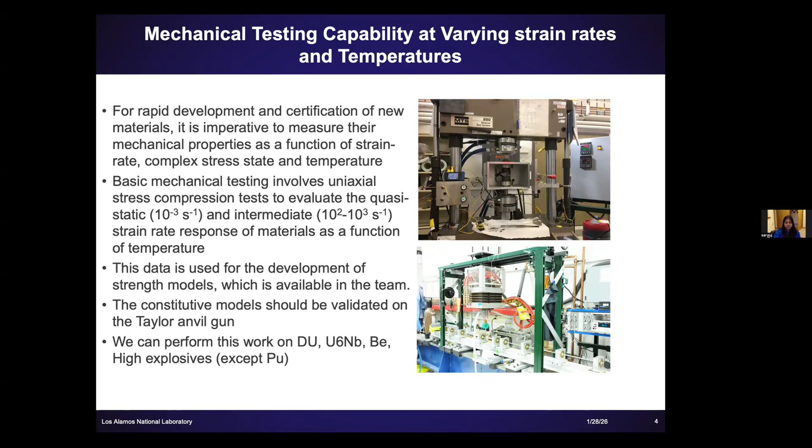We just don't work on plutonium. Thank God for that.

We also do a lot of work in the nuclear energy area. We have some unique capabilities where we can do testing on fuel at really high temperatures, up to 2000 degrees C, and we can also go to really low strain rates of 10 to the -5 to 10 to the -1 per second. That's important because in NE, when you're looking at fuels for reactors or space reactor applications, these materials are going to be subjected to really high temperatures. So we kind of built that capability.

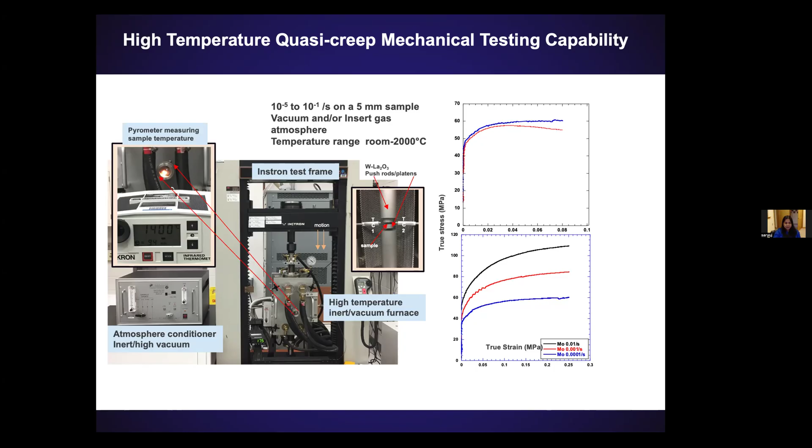This is another part of our team where, in addition to our conventional mechanical testing on materials, we also do a lot of shock experiments on materials to parameterize and measure the equation of state of materials, and to look at how materials fail, especially as a function of the microstructure.

We have 3 gas guns, an 80 and a 100 millimeter gas gun. What you really need to know is that allows us to go from 50 meters per second to about 1200 meters per second in terms of velocity and pressure ranges. So when we're collecting dynamic property data, we can investigate a large range of pressure, which is important when you're trying to parameterize these properties.

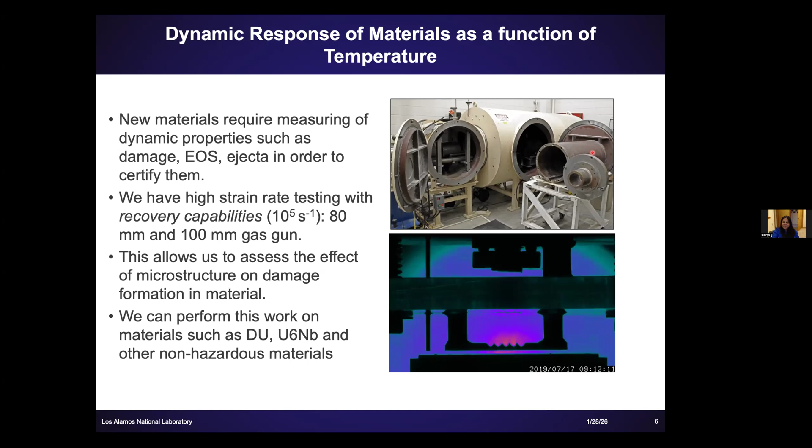I like to joke that most people on my team are actually material scientists, and we just look at shock as a way of subjecting materials to interesting loading conditions to see how they fail. That's why we also have that low velocity gun, which a lot of people don't tend to have.

I don't know what everybody's background is here, but when I first started working on shock or dynamic loading, I had no clue what we were talking about. So I'd like to explain what shock or dynamic loading is, and how you get failure under it.

Excuse me, I'm a little under the weather, so my throat hurts when I talk a lot, so I'm going to drink some water.

So a shock event is anything that creates a perturbation in your material that travels faster than the speed of sound.

In reality, how we induce that shock wave in your material depends on your application, but it can be done in multiple ways. A lot of the applications I'm going to talk about are related to gas guns, but you can also use high explosives to drive a shock into a material.

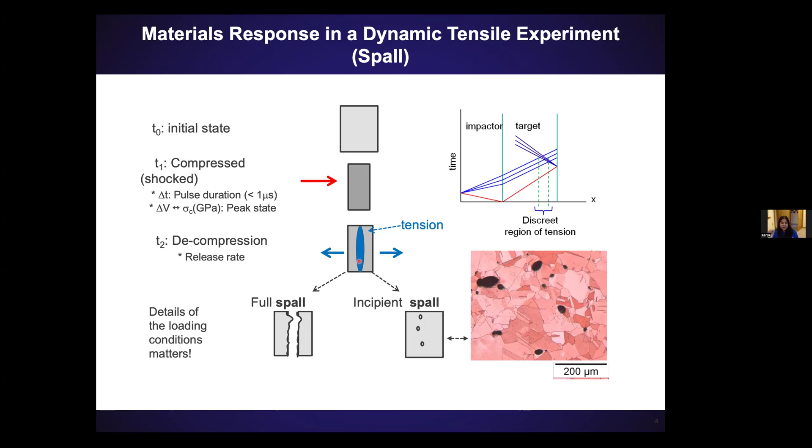For most people or most labs that do this type of work, the primary diagnostic is photonic Doppler velocimetry. Simply speaking, you shine a laser of known frequency on the back surface of a sample. As the sample starts moving, there's a frequency shift. Once you measure that frequency shift, you could do a Fourier transform and essentially get the velocity at which your sample is moving.

I'm going to run through an animation on the right side here, where you're going to see that space-time plot I showed you, and what that might look like in the velocity-time space. You get impact, and here's your laser point, the PDV point that you're measuring at the back surface of the sample.

As the sample gets impacted, the shock hasn't reached the back surface yet, so essentially your velocity is zero. The back surface hasn't caught anything yet. When your material...

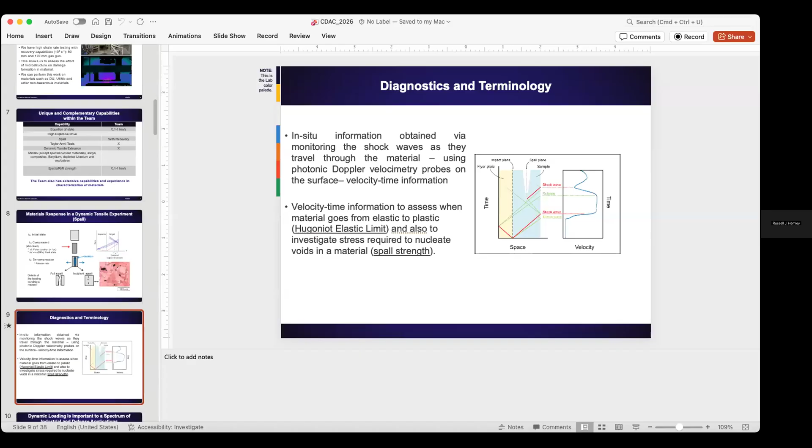I don't know what happened, my computer just quit. Can you hear me? Yes, I can hear you. Okay, I'm going to share my slides again, sorry about that. I'm not sure what happened - my computer just froze and kicked me out of Zoom. Okay, so I think I was here. Hopefully you guys all heard where I was. I think that's where we lost you.

So basically, the point I was trying to make here is nothing really happens - you don't measure anything in the PDV until something happens at the free surface. These two waves get to the surface, the material gets shocked up, then the signal stays constant. Nothing is happening until this release happens and the shock gets caught up between this small scab and the free surface, and you get this ringing type behavior.

So usually this is the primary diagnostic used in shock experiments to understand the dynamic behavior of materials. Like I told you, in our team, we kind of go beyond that and do recovery of samples.

The other interesting thing is in a lot of metals, when you do normal mechanical behavior measurements, there's a yield strength, the elastic to plastic transition stress. Similar to that, there is elastic to plastic transition under shock, called the Hugoniot elastic limit.

That can tell you a lot about your material and the deformation mechanisms being activated. You can use this free surface velocity plot to also calculate the stress required to nucleate voids. Again, that's an approximation - you look at the difference in velocity between here and the top point, and convert that using the bulk sound speed and density of the material into a stress required to nucleate voids.

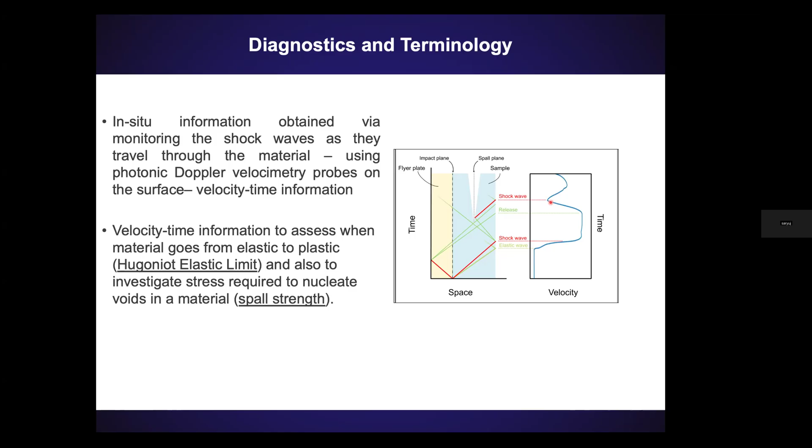That gives you an idea if I make a material using additive manufacturing versus conventional manufacturing, does that really affect the spall behavior of the material?

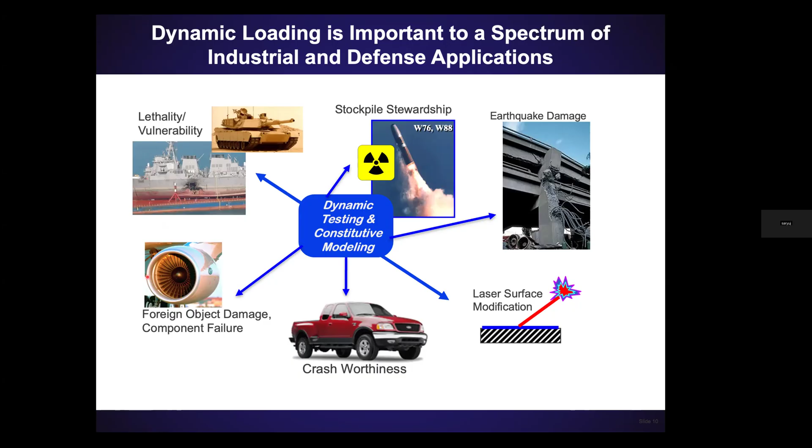Why do we care about dynamic behavior of materials? Well, there's so many applications. A lot of them are within the DoD, but also in our regular life - a few years ago, maybe a decade now, there was that plane that had to land on the Hudson River, because birds flew into its engine and caused substantial damage. So you can imagine if you want to make materials more resistant to damage, there can be multiple applications in various industries, including the car industry.

Now, in my team, of course, we can't go and do full scale tests. We can't crash 100 cars like the car makers do, or have hostile encounters with actual vehicles in the DoD. So what we do is a lot of small scale lab testing to link microstructure to failures so that we can make better materials.

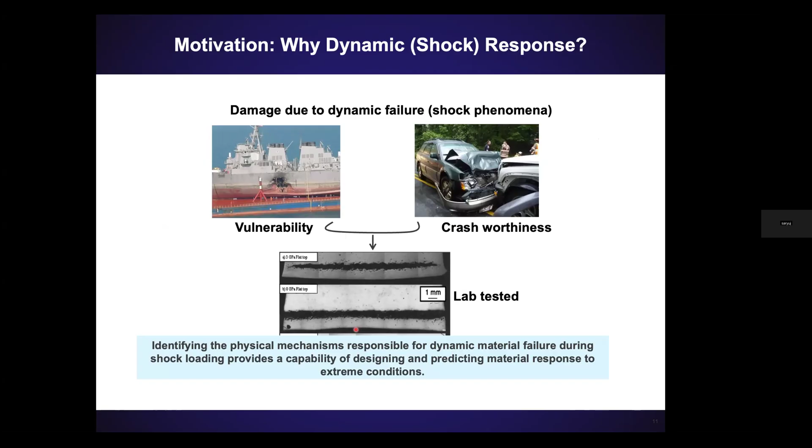So today I'm going to talk about an example we worked on in our team related to joining of different materials, and how that process itself can affect the dynamic properties of materials.

Most of you who are engineers know that it's very rare to have components made out of a single material. You can have coatings, or materials in nuclear energy where you're welding things together. Regardless of the technique, there are a lot of metallurgical challenges in general when trying to connect different materials, and those interfaces between materials are what end up dictating the lifetime of that component a lot of the time.

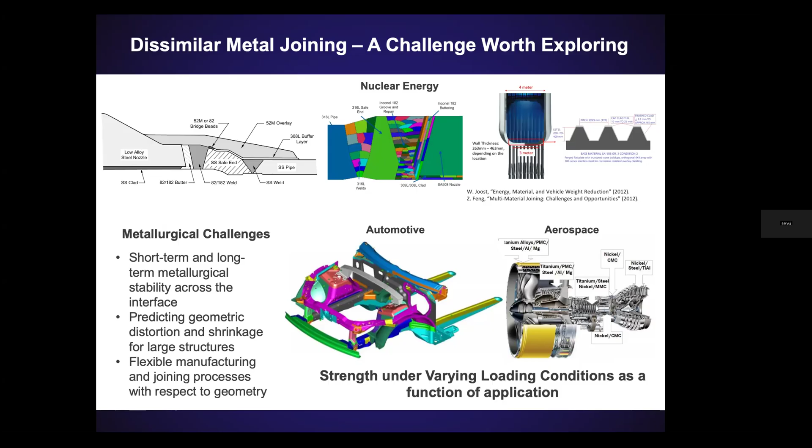There can be different thermal expansion between materials. Certain materials might not want to join at all. So that's what motivated our work - we wanted to do some fundamental science to look at how the dynamic properties of a bimetal interface depend on how you join two materials.

There are multiple ways you can join materials together. I already talked about welding. But the two we focused on were diffusion bonding, which is a solid state bonding process - it uses heat and pressure to bond material. So you can have material A, material B. You clean the surface, you want some surface roughness, you put them together, provide some pressure, and heat it up such that these materials end up joining together and forming an interface.

Another way, I just call it the metal glue essentially, where you take a lower melting temperature material and put it between A and B, again apply heat and pressure, and the braze material in the middle melts and holds it together - hence my analogy with metal glue. But you can also have braze welding, as shown in this image - the concept is the same, but here you're directly melting that braze and not really applying any pressure or temperature, more similar to welding.

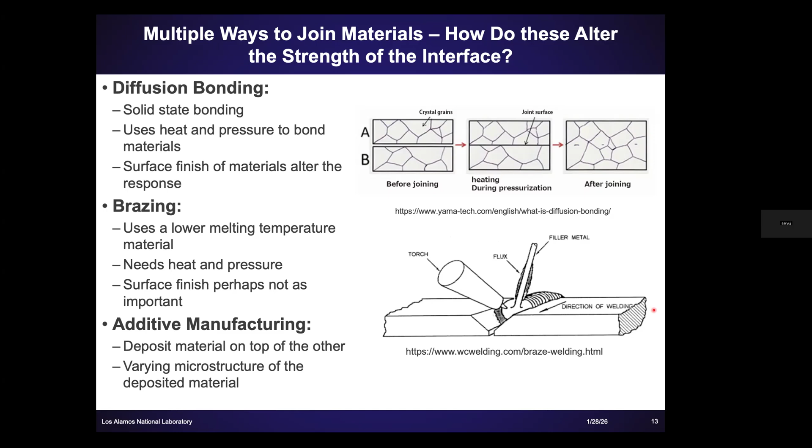And then, of course, you can have additive manufacturing, where you have a base material and deposit any other material on top of it. You can use electron beam additive manufacturing, or laser powder bed fusion, whatever is available. But the point here was: if I take the same two materials and change the morphology of the interface between them by changing how I bonded them, would that affect the dynamic behavior?

The first thing we needed to do is pick something we could do in the lab, materials that were easily available. So we decided to go with the aluminum-titanium phase diagram as our model materials. The phase diagram was useful because there were spaces where we knew we could form Ti-Al3 between the materials at temperatures accessible to us using the furnace we already had in our lab, without buying new equipment. So we knew we could probably form a stable interface between these two materials.

But we also wanted to understand, once we do that, what does that interface actually look like? We did some work and found that the interface tends to be kind of wavy. The reason we needed this is, if I'm trying to understand how interface properties or morphology affect dynamic properties, I need to change one variable at a time—be it the shape of the interface, the materials between the interface, or the interface region thickness. Experimentally, it's almost impossible to do. Anything you do to materials to put them together will change multiple things at a time.

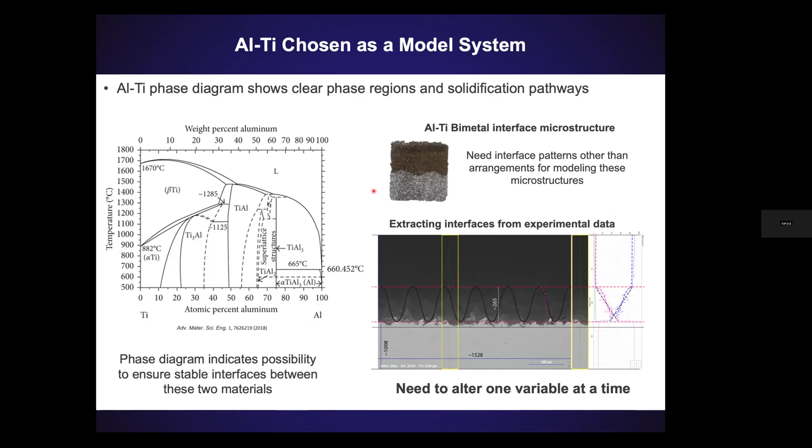So in this case, we decided to use molecular dynamic simulations, because in a computer I can do whatever I want. Then we can go back to experiments and try to do some smarter experiments to validate some of the insights we get from simulations.

So for those of you not familiar with molecular dynamics, it's essentially solving Newton's second law of motion—F equals ma—at the atomic scale. You can extract that position-time plot like I showed you during the shock simulations. You can simulate the grain structure in a material.

Now I'll put a caveat there. When I say grain structure, sure, you can have the morphology of the grains, but we're limited in terms of how large our grains can be. Usually the grain size is a few nanometers, whereas experimentally the grains are tens of microns. So the point here is we're trying to get qualitative insights from molecular dynamics, not necessarily solve the whole problem and get quantitative information.

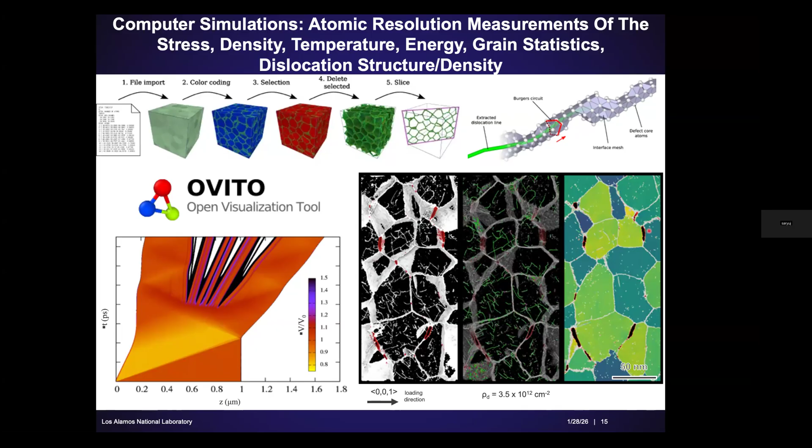But the nice thing is, once I've run the simulation, I can look at the microstructure, I can look at how much dislocation density is formed in my material under shock loading. Where did my failure form in the microstructure? And I'm going to use that to look at bimetal interfaces.

So the first thing when trying to put two materials together is figuring out the orientation relationship between the two. Aluminum and titanium were nice because there was a Shoji-Nishiyama orientation relationship between them, and other people had made flat interfaces between them. The lattice constant for these two materials is different, so when you're putting them together, you have to expand one lattice and maybe contract another, which leads to the formation of misfit dislocations at the interface.

Essentially what we do is calculate the strain that will be in both materials. We put the materials together and equilibrate them such that we form the lowest energy structure. That forms your flat interface.

But like I told you, I was interested in how the interface morphology or shape affects the dynamic behavior, and MD lets me do that. So we wrote a special code that lets us change the interface shape in different ways. One thing we did is form a wavy interface—this was important because our experimental detective work had shown that many of these interfaces tend to be wavy at the atomic level.

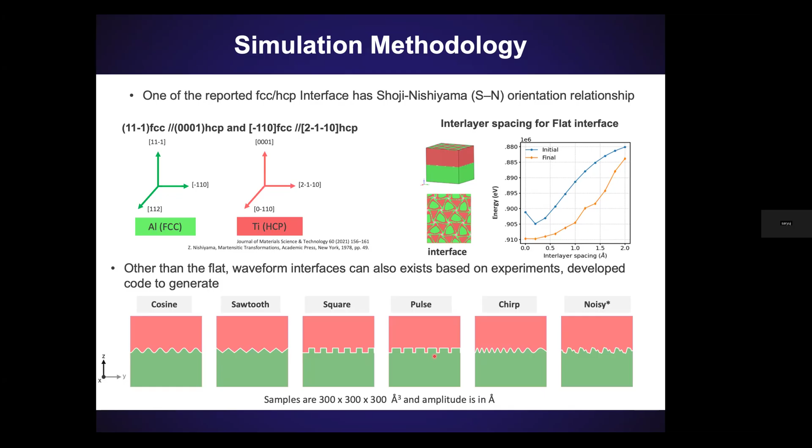We also wanted to see—what if instead of rounded cosine waves, I had a sawtooth interface? Does that improve the dynamic behavior of the material at all? What about a square shape—maybe that would be better? Wider squares, or any kind of shape, you can pick and choose.

I won't go into all the details since I have a ton of slides to show you. But when doing molecular dynamics simulations, you need to pick an interatomic potential that is realistic and can reproduce the properties of the material. So we used an embedded atom method potential for aluminum and titanium. Our cell was a 30 by 30 by 30 nanometer cube.

Now remember, this is what I was trying to say: only 2 million atoms. Experimentally, that's like nothing, right? I won't even see this unless I was using a fancy TEM, and even then this is really pushing the spatial resolution of some of those instruments.

But we're only looking at qualitative insights and not quantitative data here. I'll show you the experiments we did and how they compared with our simulations. All the simulations were done at room temperature.

Another thing to keep in mind is that the strain rates in the simulations we're running are really high, 10 to the 8 per second.

Before we did the shock simulations, we wanted to look at compression testing between the two materials as a function of interface shape, because that gives us an idea about how the dynamic response would change. So that's what we're going to start with.

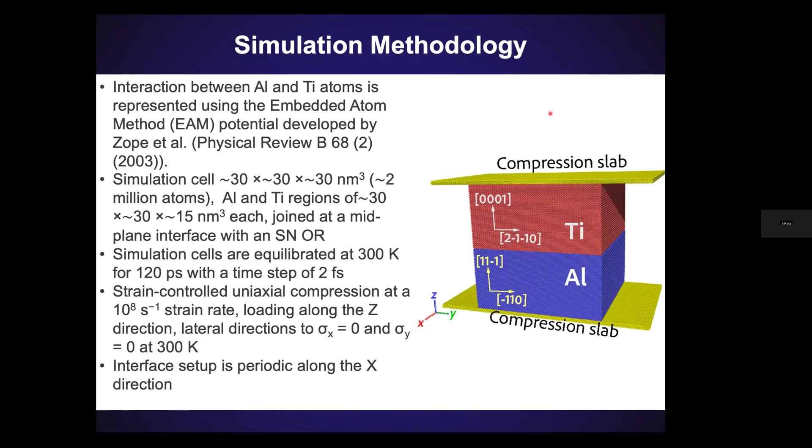Really, the end goal is if we could make our material stronger by changing that interface shape, that's a win for us. Or maybe the answer is you can't do anything because that interface shape doesn't matter.

So we ran our simulations, and I'm not going to show everything. I'm going to focus on 4 different types of interfaces.

That's why strain rate matters, because you have different deformation mechanisms. Also in molecular dynamics, you start with these perfect cells with no pre-existing defects. In reality, most materials have defects.

So the 4 different shapes we looked at were a flat interface, a cosine interface, a sawtooth interface, and a square interface. We kept the frequency the same but changed the amplitude, making the waves taller versus shorter, but kept 3 of them in all these cases.

The first thing to notice is that the flat interface in general tends to have a pretty high yield strength compared to these rough interfaces. In fact, we wanted to understand why.

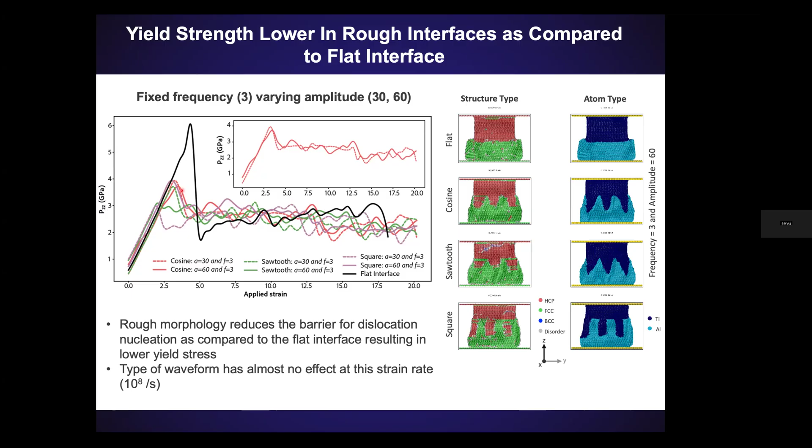In the older stuff, we were trying to figure out whether the shape of the interface matters — cosine versus sawtooth versus square. If I zoom in here, it's within noise, I'd say. They look very similar in terms of yield stress — it's not like one is super high versus low. So we were thinking that going from cosine to sawtooth to square maybe doesn't have an effect on the stress strain response at the strain rates we're at.

However, if you change the amplitude within a certain shape — for example in the cosine, a large amplitude versus a smaller amplitude, 60 angstrom to 30 angstrom — my peak stress would change somewhat. It's a pretty small difference, but it was changing, and we wanted to see why amplitude would have an effect at all.

One of the things we measured was the interface length. A flat interface has the shortest interface length, and as your amplitude goes up, your interface length goes up, and that essentially can be attributed to the lower yield stress you see, because now you're nucleating more dislocations as you change that amplitude.

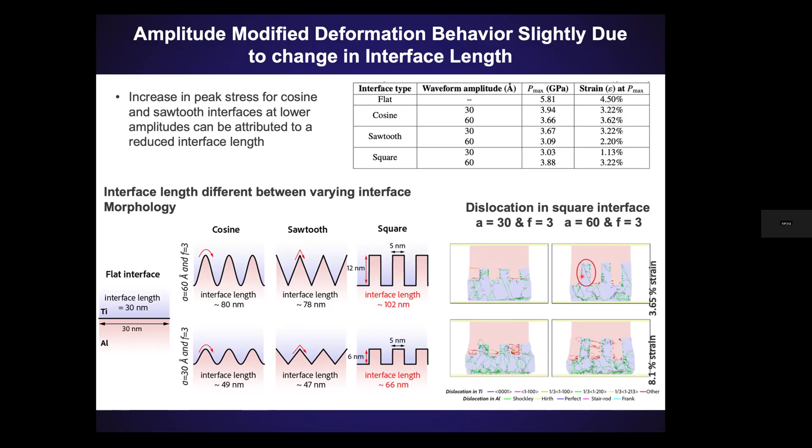Here's a good example for the square wave. When you go from 30 to 60, the deformation is almost like that nanopillar compression test they do, versus the smaller pillar, which deforms more like just a roughness, not so much as its own kind of entity. So we thought amplitude probably changes the response slightly because you've changed the interface length, and that changes the deformation mechanisms in your material.

What about frequency? If I have one big rough interface versus multiple perturbations in the interface — we picked the cosine interface and looked at the same amplitude, 60, and just changed the frequency from 1 to 2 to 3 to 6. We also plotted the stress strain response of the flat interface as a reference. What you see is that at an amplitude of 60, changing the frequency, having a single versus multiple waves, doesn't seem to have an effect.

Except you could convince yourself that the lower amplitude, when you look at the deformation, behaves like a flatter interface. But in the stress strain response, the red one — the lower amplitude — still has a much lower yield stress compared to the flat interface. So far, a rough interface has a lower yield strength. A higher amplitude interface is a little weaker than the lower amplitude one. The frequency at those high amplitudes doesn't matter — one perturbation or 3 or 5 shouldn't matter much in terms of stress strain response. But what changes right away is if you have any perturbations at all in your interface.

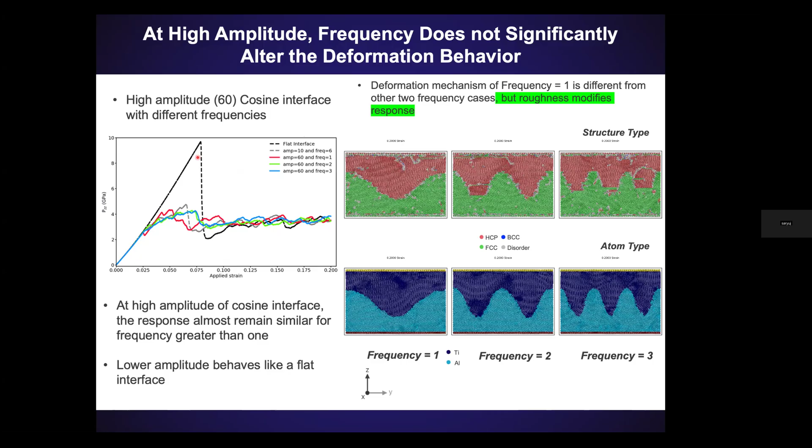Most interfaces atomically are never flat. The other thing is, when you're looking at components, you don't just have bimetals nicely lined up with your loading direction.

So we also wanted to understand how the orientation of the interface with respect to the loading condition affects things. Let me restart the movie. Here you can see we rotated the interface. Remember, our loading is top to bottom, so you're changing the orientation of the interface with respect to that loading condition. You go from completely perpendicular, 90 degrees, to 0 degrees, completely parallel to the loading conditions.

We wanted to see: does this matter more than the interface morphology or roughness we were seeing? From the stress-strain response, if you look at Pmax versus interface orientation, the peak stress decreases. You get a lot more deformation as you go from 90 degrees to 45 degrees.

This is because you're changing the critical resolved shear stress and nucleating more defects in materials with the loading. Eventually, as you keep going up, you activate things like twinning in titanium and maybe even some phase transitions—which, by the way, I wasn't sure if that's real in titanium. In molecular dynamics, we're at pretty high stresses, but that could also be due to the potential we're using.

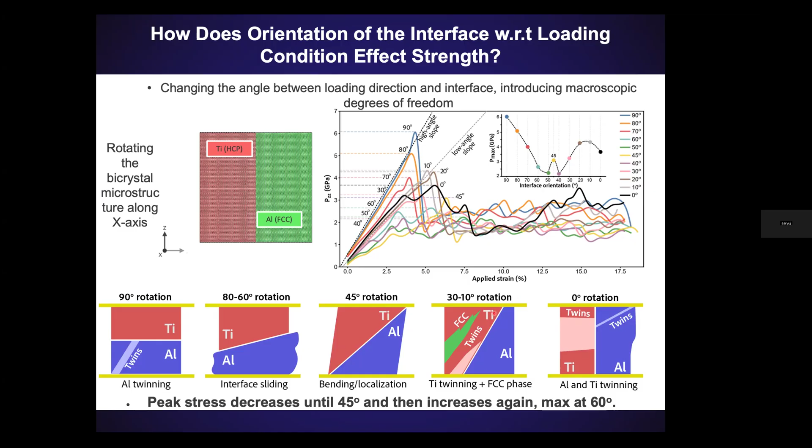Basically, you can go from dislocation slip to twin nucleation transition as you change the loading orientation, and that seemed to have a much bigger effect on the mechanical response of the interface. We quantified the amount of dislocations—I won't go into detail, but as you change that rotation, the deformation mechanisms in aluminum and titanium change.

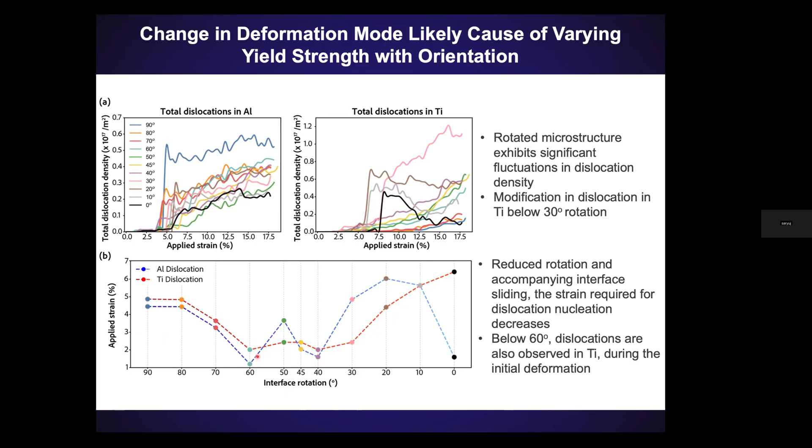Essentially, there's a sweet spot where you want your interface to be. Below that, your material is going to be too soft. If we look here, these are dislocations—you don't want too many, you don't want too little. I think 60 degrees orientation ended up being the highest yield strength for the interface.

What about the other thing we were seeing—in that flat interface, we'd see a lot of sliding between the materials, especially as you rotated and pushed them; one material would slide with respect to the other. But when you added that rough geometry or shape at the interface, you lock in those interfaces and basically stop the sliding behavior. You see a lot more twinning in the material compared to the flat interface.

Here are the stress-strain responses for a flat interface versus a cosine interface as a function of that rotation. At 90 degrees, the behavior is different, but eventually, as you keep rotating, they both start behaving very similarly. What that told us is that orientation of the interface with respect to the loading condition matters more than the exact shape at the interface.

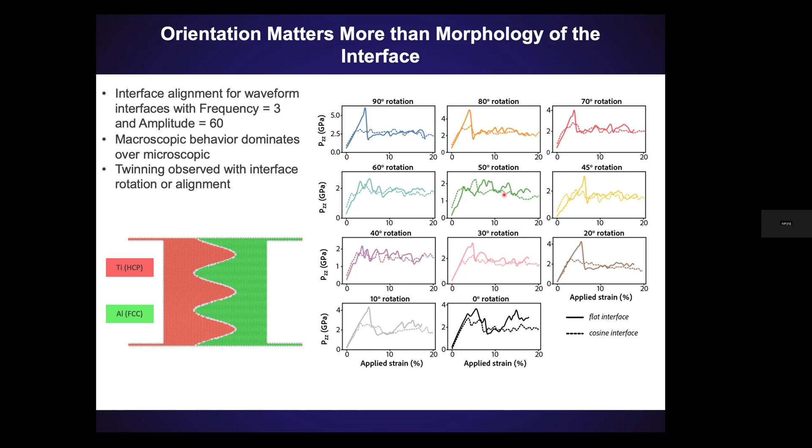What does that mean in practical terms? That little detail at the interface—whether diffusion bonded or additively manufactured—is not going to matter as much for practical applications, at least under uniaxial stress loading. What about shock? We'll talk about that. Here I'm showing movies where you can see when you have a flat interface, you get sliding between the materials, whereas with these perturbations, they lock in the materials together and prevent that sliding.

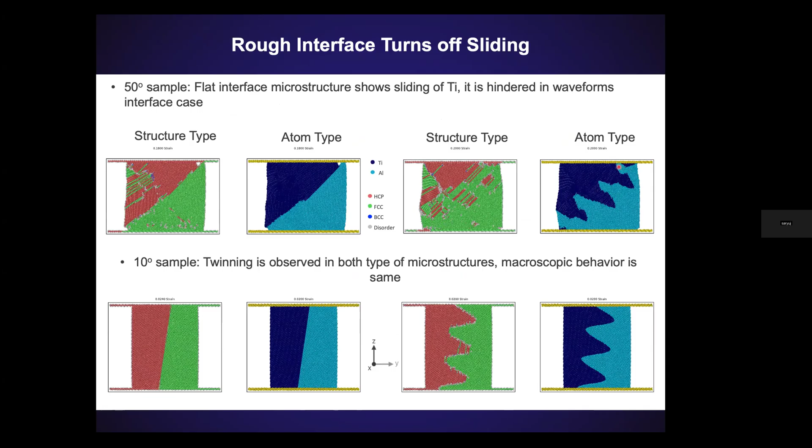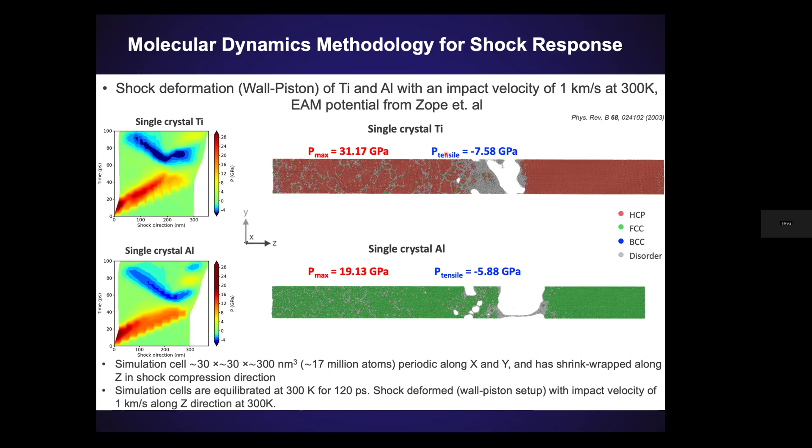In this case, this is single crystal titanium and single crystal aluminum. The shock goes from left to right, and release waves come in. You start nucleating voids. What you notice is that the stress required to nucleate voids in aluminum is about 5.8 GPa, and in titanium it's 7.6 GPa. So in general, aluminum has a lower spall strength compared to titanium. That's good to know.

So then when we did our simulations with the interfaces in place, let me see if I can slow down the movie and get rid of my pointer. Okay, so the first thing we'll do is look at our position-time plots.

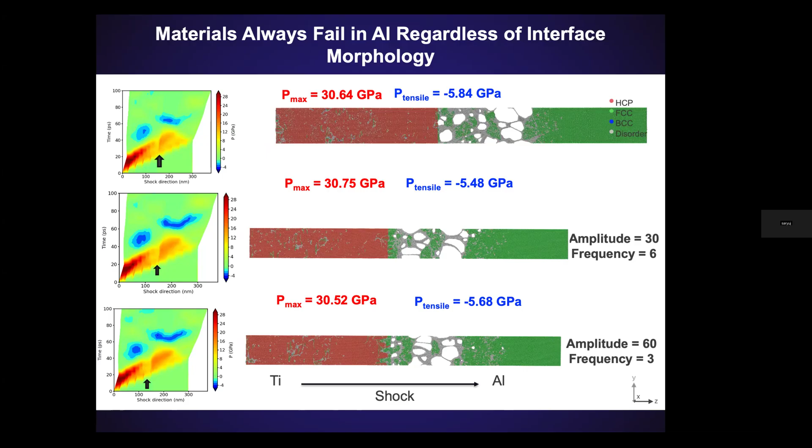So let me get rid of my arrow again and play this movie for you. If you look, shocks are coming in, defects are nucleating, and you form voids on the aluminum side. Regardless of the interface roughness, you always form voids on the aluminum side. We designed these simulations so the region of maximum tension would be at the interface, but in molecular dynamics, the interface is apparently stronger than aluminum, so no matter what you do, you form damage in aluminum.

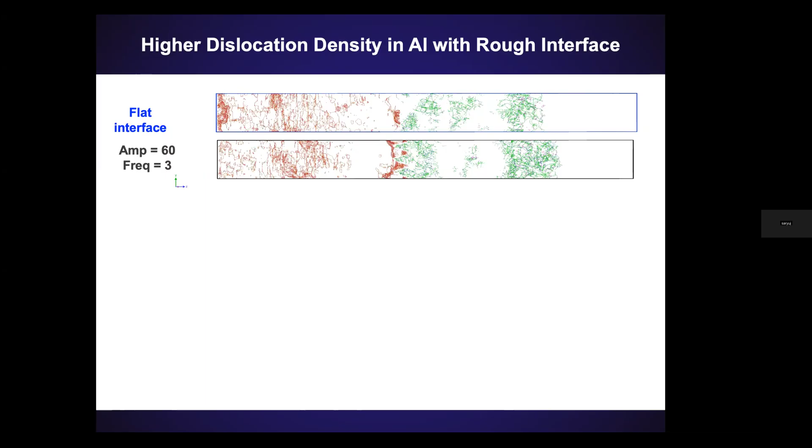In fact, when you look at dislocation nucleation, similar to what we saw under uniaxial stress loading, you see a lot more dislocations nucleate from the rough interface compared to the flat interface. While interface roughness mattered under uniaxial stress loading, because you had a different elastic to plastic transition stress, under uniaxial strain loading it doesn't matter—impedance mismatch is ruling the day because you're failing in aluminum no matter what.

How does this compare with experiment or reality? Because molecular dynamic simulations can have their own issues, so to check that, we actually did some experiments.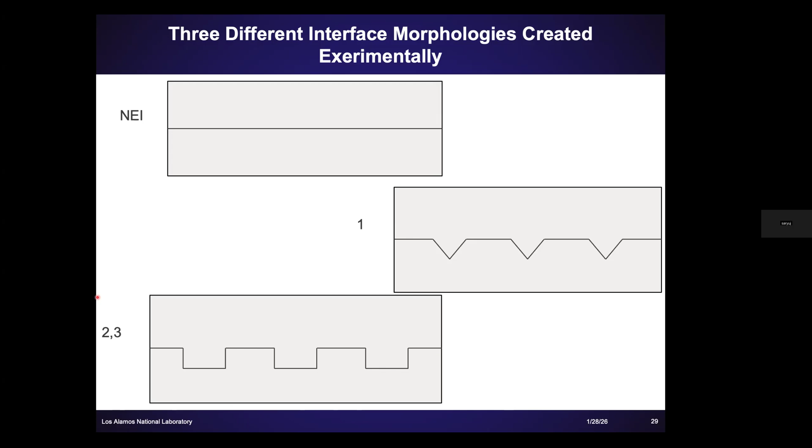We made three interfaces. First, we took two pieces of material and joined them together using diffusion bonding. Then, in one case, we made defects in the titanium—imagine taking a sharp tool and making a scratch, then doing diffusion bonding, so the interface looked like this versus a square kind of interface. Again, we made the defects in titanium and bonded them together. We did gas gun experiments again, where we captured this, soft recovered the materials, and looked at them afterward.

The first thing is, I don't know how to calculate the spall strength in these materials, because one of the things we took advantage of is that there is an impedance mismatch between titanium and aluminum. As the shock goes from titanium into aluminum, you get a secondary release wave at this interface, and that release wave can interact with the release wave from the back and cause a separation of this interface just under shock—you don't even need to do spall.

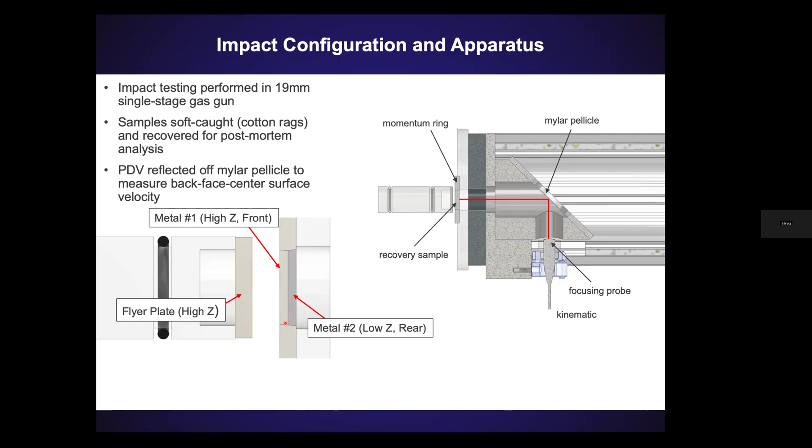And that's why you see this type of velocity-time profile. It's really hard to get a clean measure from these. You could take this difference and call it your pullback strength, and because we were failing at the interface, we could call it the strength of the interface, essentially. We could see that this is my flat interface, there's a difference. If I take the same flat interface and shock it multiple times, there is some variability in what you'd call the spall strength of that interface.

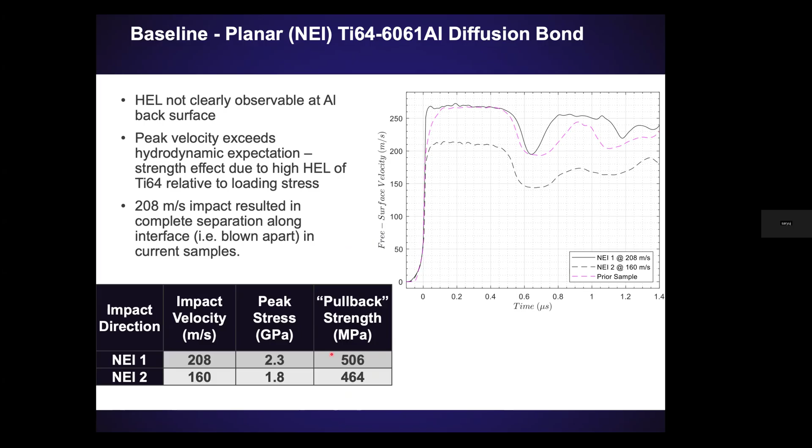In fact, when we recover our sample, we do see that the material fails at the interface. But this is really different from what we were seeing in the MD simulations, because in MD simulations, we're always failing on the aluminum side and never on the titanium.

We would expect delamination of the interface rather than the void nucleation and failure that we were seeing in aluminum in the MD simulations.

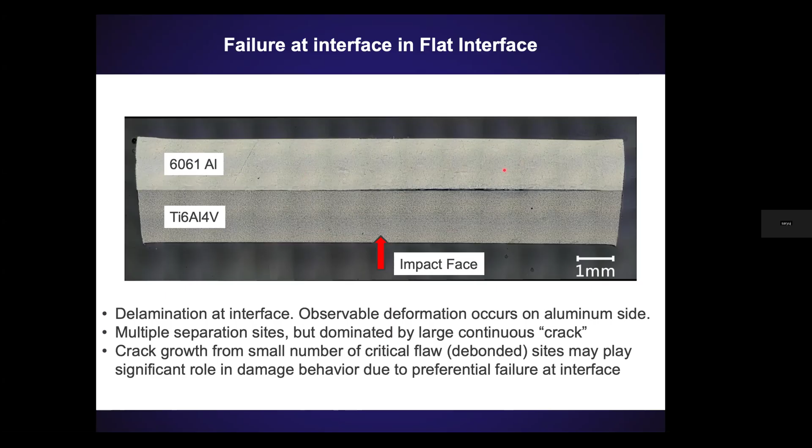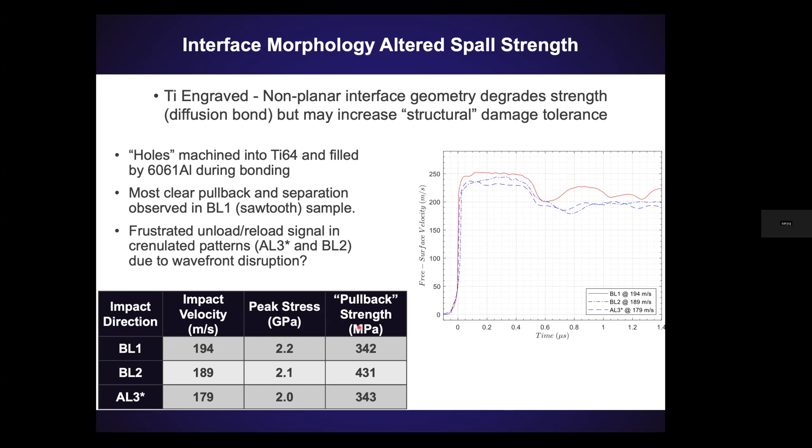But again, PDV is one diagnostic. When you look at the interfaces and how they fail, you notice that the flat interface was delaminating. The pointy interface basically came apart at the interface completely. The interesting thing was when you have the square interface, these vertical regions stay together while the horizontal regions come apart.

That was really interesting. But the thing that was driving me nuts was, what's going on? I don't understand why we're not matching our simulations, because in our simulations we had titanium and aluminum, the shock coming from titanium into aluminum, same as in the experiment. So why could there be a difference?

So there are multiple things that could be going on. And when I say difference, I just mean qualitative difference. I wanted molecular dynamics to at least show failure in the same locations that we were seeing experimentally.

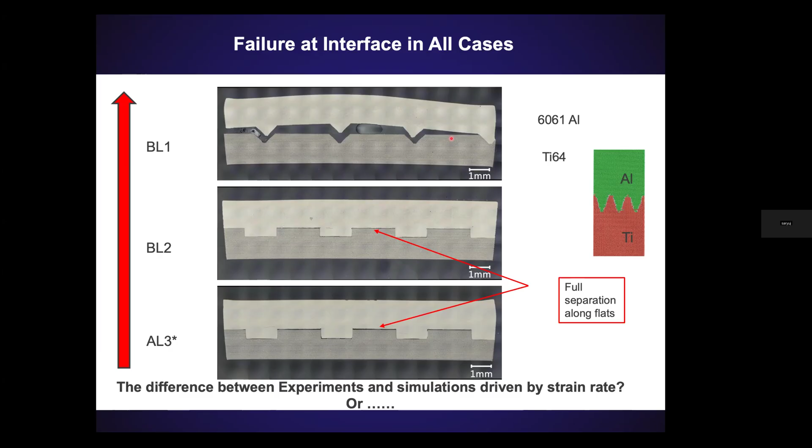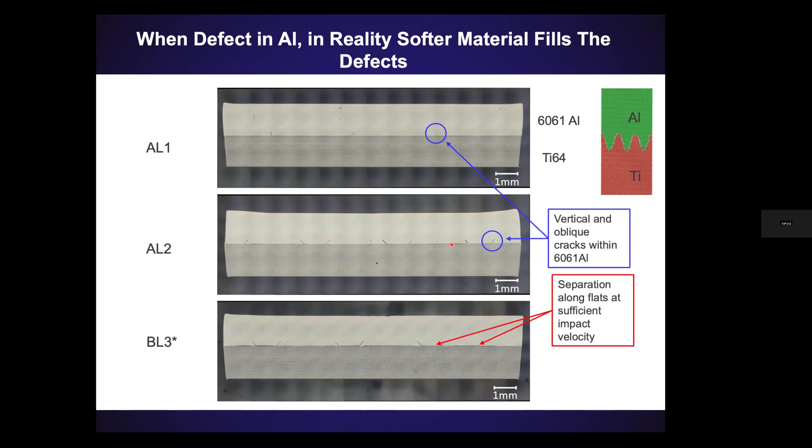Another interesting thing was that depending on how you made the interface, that really mattered too. In cases where we put the defects in aluminum, right here, and then bonded them to try to create a rough interface, what we saw was that aluminum just filled those defects, and the interface essentially acted like a flat interface. So we could switch the dynamic response of these interfaces on and off by having a flat interface versus rough perturbations at the interface.

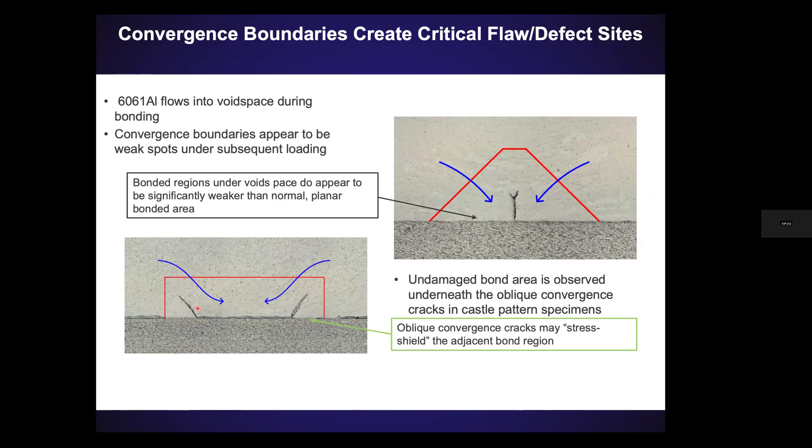This is a zoomed-in image highlighting the fact that we had a defect in aluminum. When you diffusion bonded them, the defect heals, and everything essentially looks like normally bonded material.

So the reason I show this slide—I don't have the coolest conclusions here—but I wanted to give you an example of work where we use molecular dynamics and experiments to try to design interfaces that can help improve mechanical response both at low rates and under shock in materials.

Basically, the thing that ended up being interesting is MD shows no change in spall strength as a function of interface morphology—doesn't matter. It does show varying dislocation density, similar to the uniaxial stress response. These are the opposite of what we see in experiments.

I discussed multiple reasons, but I think dynamic response tends to be dominated by the impedance mismatch more than the interface morphology. I think this is important because a lot of people are doing research right now trying to do interface engineering between multiple materials to control dynamic response. And I think what we're saying is it's going to be the density difference between the two materials that's more important than changing the morphology.

This also gives us the freedom, if we have to join materials that will be used in dynamic applications, to use whatever technique we can to join them together, because that interface structure itself is not going to matter. It's going to be the macroscopic difference in impedance that plays a role in dictating its overall response.

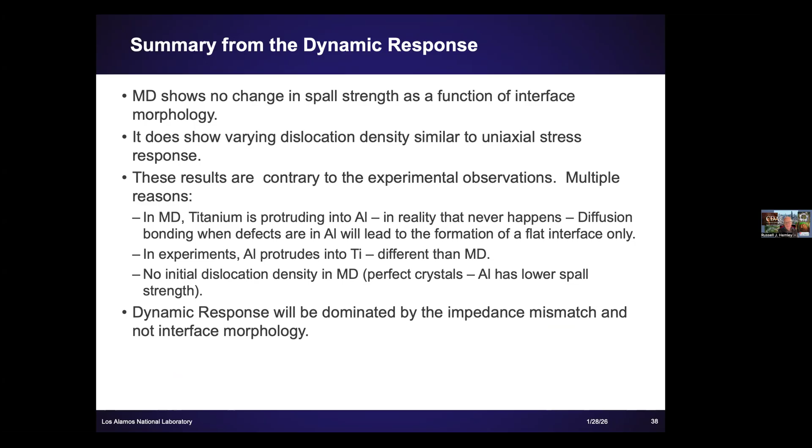Thank you very much, Saryu. Very informative and pedagogical talk, a great example. I know it's very academic. I usually like talks with a nice ending with a ribbon on top, but I sometimes like to give these talks where we did a lot of work, we learned some things, but not everything was successful. But this is how we can use multiple tools together. It was very clear.